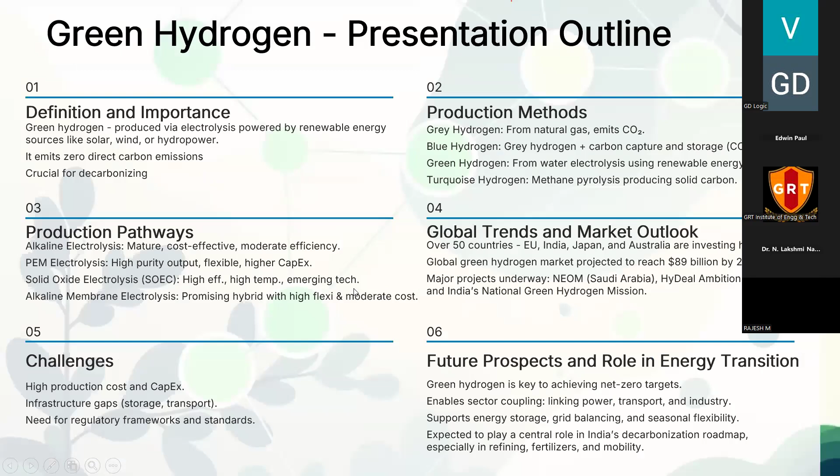Today we are talking about green hydrogen. The content of this presentation is definition and importance, then production methods, production pathways, global trends and market outlook, then challenges, future prospects and roles in energy.

What is green hydrogen? First of all, it is produced via water electrolyzers powered by renewable energy, solar, wind, resulting in zero GHG emission, in contrast with gray fossil fuel and blue fossil based carbon hydrogen, which are not covered in green hydrogen. Key attributes are zero direct CO2 emissions, high energy density, and it is a versatile carrier enabling decarbonization of hard to abate sectors.

Today we know that the process in which hydrogen is produced defines the color of the hydrogen. Now we are going to review green hydrogen.

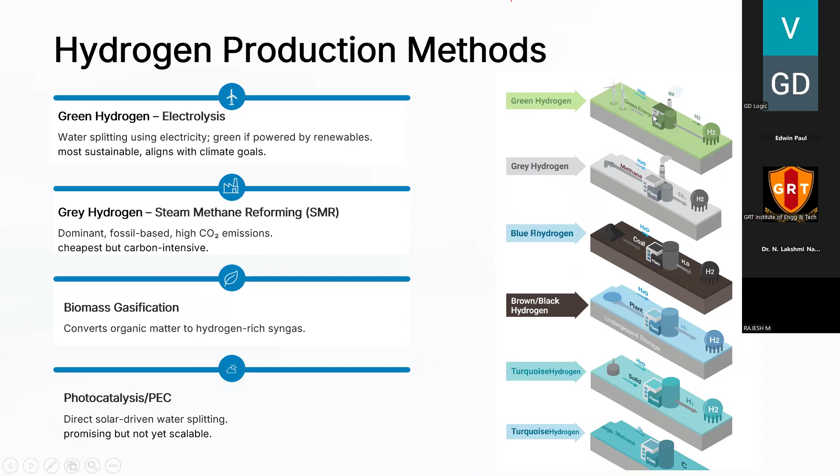If you see here, I've shown green, gray, and biomass gasification also. That is also one of the green hydrogen methods, and photocatalysis PEC also is there. The picture on the right side clearly explains green hydrogen, the windmill and solar system. If we use a solar system or wind renewable energy, then water is used.

This is a comparative overview of hydrogen production methods. Here I'm showing steam methane reforming. The natural gas reacts with steam to produce H2 and CO2, then separation happens. So fossil fuel, natural gas is the energy resource. The efficiency will be 65 to 70%.

The cost range is $1 to $2. The effect of this hydrogen is high CO2 emission, most common today, can be paired with CCS, carbon capture storage. If we consider carbon storage, then this will be blue hydrogen.

Then again coal gasification: coal reacts with oxygen and steam, and H2 is produced. We are using coal as the medium for this. The efficiency of this gas is 45 to 50%. The cost is very low, $1 to $2. The carbon footprint is high, used in coal-rich countries, environmentally damaging.

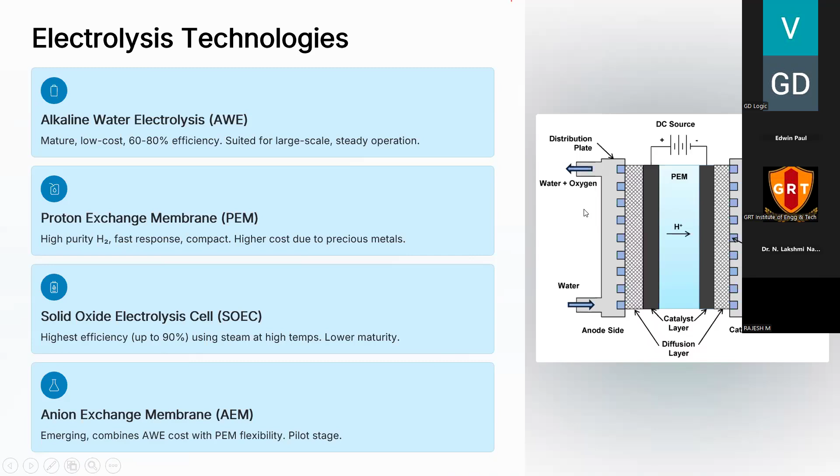I'm jumping to another topic, the electrolyzers. How H2 is produced through the electrolyzer method is very simple. Alkaline water electrolyzer, what we call AWE, mature, low cost, 60 to 80% efficiency, suited for large scale operation. The right figure clearly shows water as input, then the left side is the anode and right side is the cathode. The PM passes through this catalyst and we are splitting water; hydrogen is the output on one side, and water plus oxygen on the other side. So we are splitting H2 gas here.

In India's approach, future green hydrogen hubs across India: here is a regional breakdown of India's emerging hydrogen ecosystem. Hydrogen Valley Innovation Cluster, HVIC, launched in November 2025 under National Green Hydrogen Mission 2023. Gujarat is the hub for this. Major projects are by Reliance, Adani, and Ocior Energy, focused on export and industrial usage.

Then in Karnataka, there is ACME group and state government collaboration for green hydrogen production. Another program in Kerala: Vizhinjam Port and Kochi-Trivandrum corridor for bunkering. Odisha is also working on this. In Rajasthan, Inox Air Products is working on NTPC hydrogen projects. Then there is one more project in Tamil Nadu, emerging interest in coastal hydrogen infrastructure, potentially linked to export corridors.

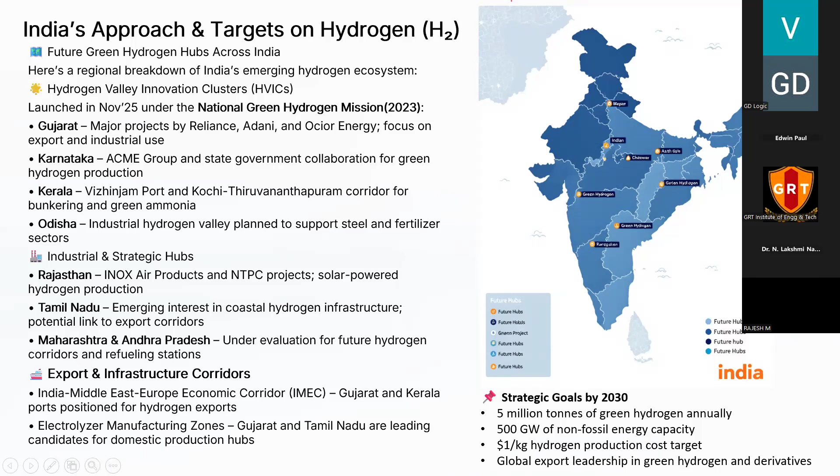The approach is very clear - India's approach, the National Green Hydrogen Mission. It was formed in 2023, then launched to make India a global hub for green hydrogen production and export. The target investment is 8 lakh crore, aiming to create 6 lakh clean energy jobs.

Cost reduction now, as we discussed, current cost is around $4.5 per kg. The goal is to reduce it to $1 per kg by 2030. That's our target.

This enables competitiveness with fossil fuel in steel, fertilizer, mobility, and heavy transport. Strategic partnership - hydrogen diplomacy with the Gulf nations and Europe. That is the strategic partnership we made, including the India-Middle East-Europe economic corridor for hydrogen exports.

Renewable energy integration means leveraging low-cost solar and wind power, and local electrolyzer manufacturing to cut costs. Our vision is global leadership by 2030 - to position India as the world's lowest cost green hydrogen producer by 2030, transforming industries, reducing carbon footprint, and boosting circular economy innovation.

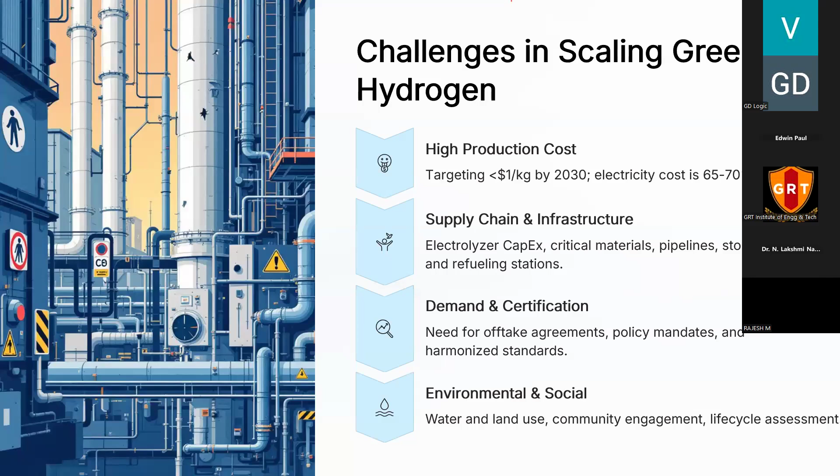Then demand and certification needs offtake agreements, policy mandates, and harmonized standards. Now, each and every research and government body is working towards standard formation and policy - the whole team is working on this. Then there's environmental and social aspects: water and land use, community engagement, life cycle assessment.

Future prospects and role in energy transition: decarbonization, essential for net zero targets in hard-to-abate sectors. Energy storage is another future prospect. Then global trade and innovations - a lot of innovation is required from research-oriented institutions, government bodies, and OEMs.

A lot of OEMs are working on innovating the application and production. Then there's just transition, job creation, regional development, and energy security.

In green hydrogen production, there is one method, steam methane reforming (SMR) technology. The technical details on process: its emission cost is 7.5 to 12 kg CO2 per kg of H2 produced. Blue hydrogen integrates carbon capture up to 90% removal, but upstream methane leakage remains a concern.

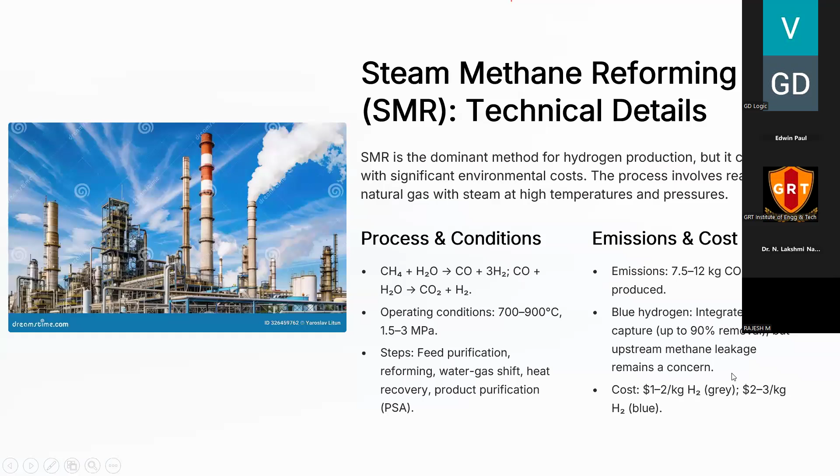Just a minute. Oh, sorry, I lost it. Sorry about that. My screen is below, sorry.

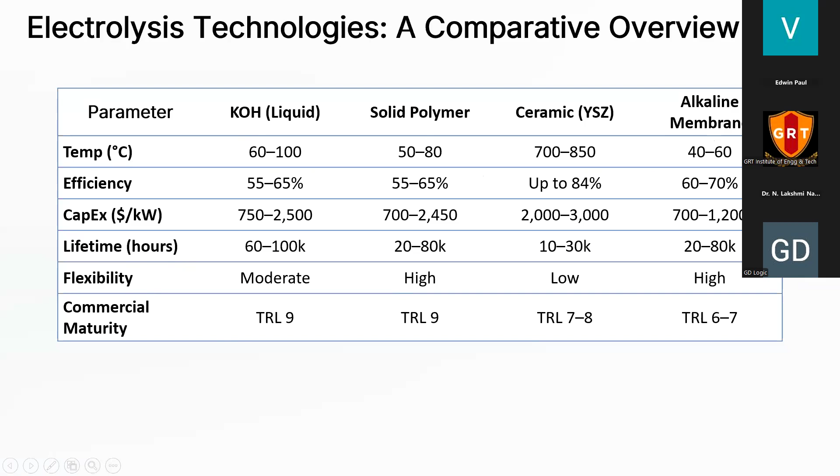When we see the parameters of different methods: the temperature in the KOH method will be around 60 to 100, and the solid polymer 50 to 80. The ceramic method is 700 to 850, and alkaline - this table clearly shows the difference between the different process methods.

Biomass gasification is another method of producing gas, converting organic matter into syngas at 700 to 1200 degrees centigrade, which can achieve negative emissions with carbon capture and storage.

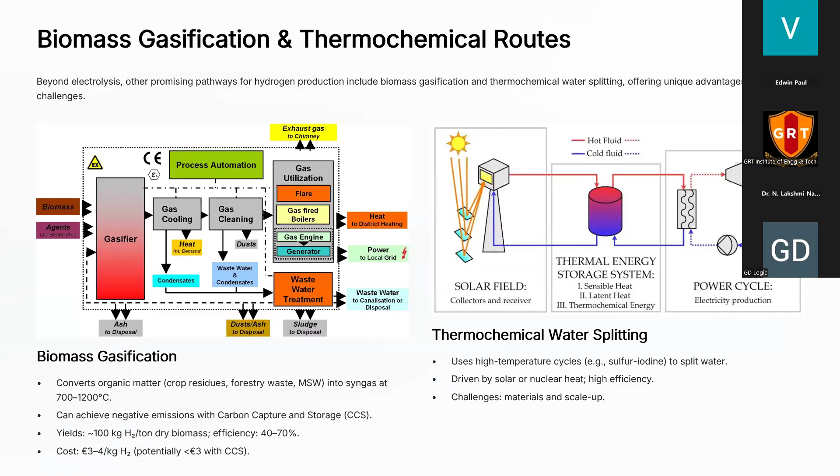There is another method, thermochemical water splitting, using no photocatalyst, and direct solar-driven water splitting using semiconductors and catalysts.

There is another complicated method called biological hydrogen production. A lot of R&D is going on in this method - dark fermentation and photo fermentation, biophotolysis, and microbial electrolysis cells are being used.

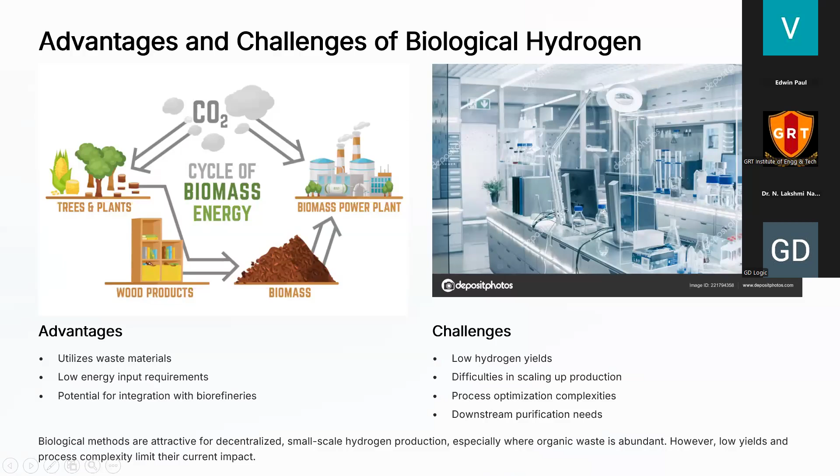The comparative assessment of hydrogen production methods: for the SMR method, the GHG emission per kg of hydrogen is 9 to 12 kg of CO2. The water usage is around 9 liters per kg of hydrogen. The typical cost would be around 80 to 120 rupees.

If we make it through SMR plus CCS (carbon capture storage method), the color coding will be blue. Emission is 2 to 7 kg CO2 per kg of hydrogen, water usage remains around 9 liters, and the typical cost will be 160 to 200 rupees.

Today's topic is about green hydrogen. One of the methods is electrolyzers. The emission is 0. If it's powered by renewable energy, then it is 0.

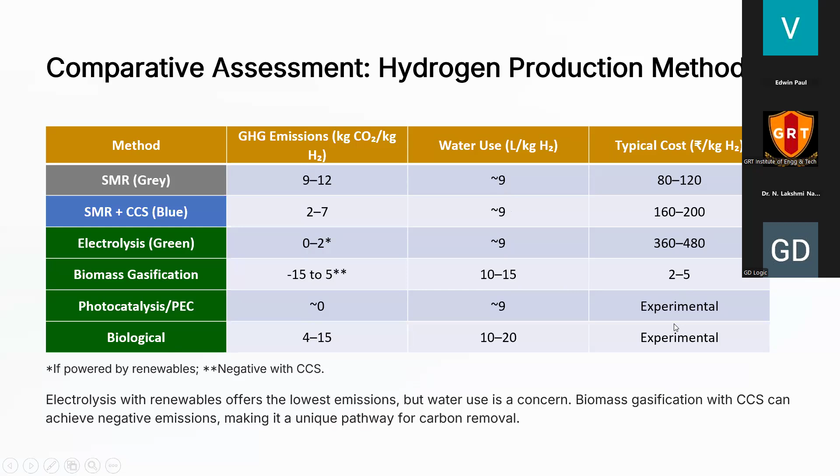Similarly, photocatalyst and biological methods are under experiment, so the cost is not available at the moment.

The production pathways: electrolyzers with renewables is the most mature green hydrogen pathway, integrating with solar, wind, hydro, rapidly scaling with global electrolyzer capacity projected to reach 230 to 520 gigawatt by 2030.

If we consider photocatalyst and PEC, direct solar to hydrogen conversion is promising for future cost reduction. Key research focuses on catalyst development, reactor design and scale up. There is another method, biological method, which includes dark fermentation and photo fermentation, but the yield is very, very less in this method.

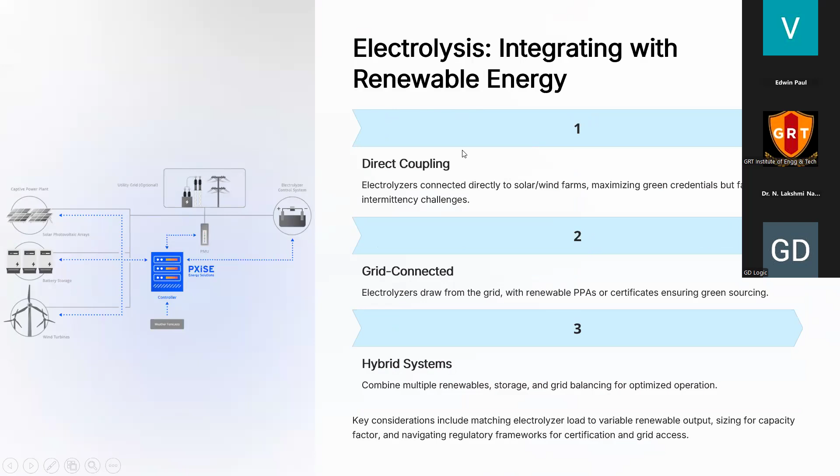Renewable energy - electrolysis integrating with renewable energy, grid connected hybrid systems. Electrolysis manufacturing and supply chain is again a challenging one.

India is focusing on this. The key trend here is focus on cost reduction through scale and automation shift. A lot of R&D is going on this.

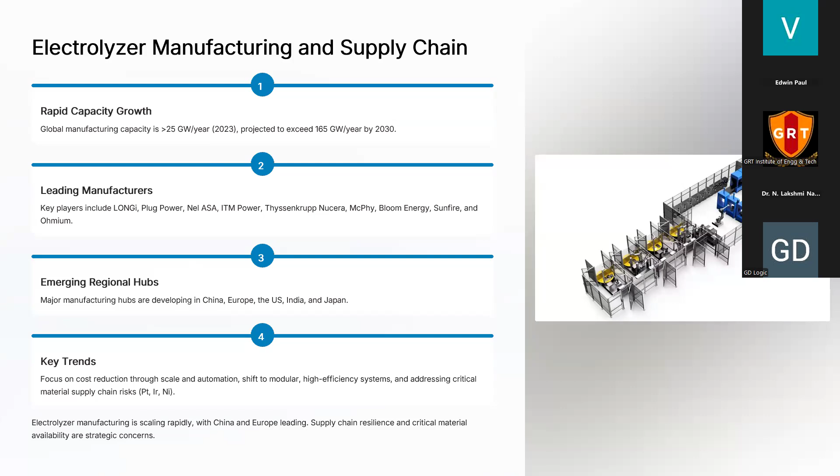At the moment, looking at global trends in the market, so many countries, research institutions and OEMs are working on this.

Hydrogen demand exceeds 90 million tons per year at the moment in 2025, with green hydrogen rapidly growing from less than 1% of supply. Project boom - over 1,500 green hydrogen projects announced globally, targeting, as I told you earlier, 230 to 520 gigawatt.

Now leading the regions - China is leading these developments, and a lot of R&D is going on. Then Australia, EU, European Union, then United States, India also we are working towards this target. Saudi Arabia, Oman, Chile, a lot of countries are working.

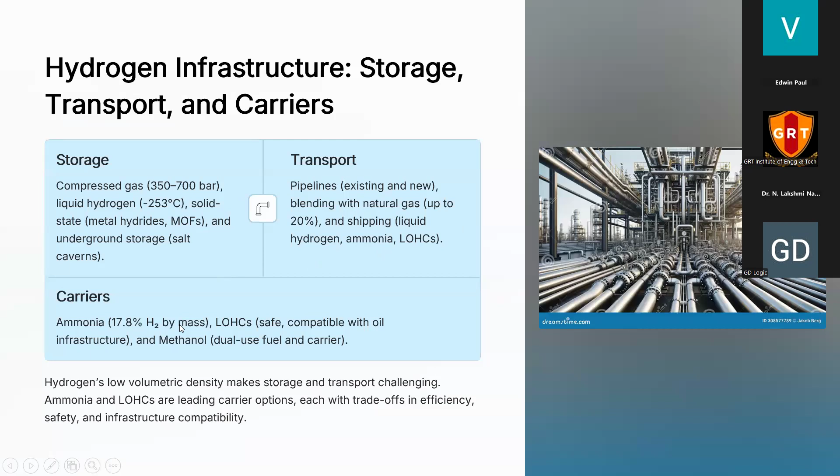If we talk about the India specific context and national strategy, as we're discussing, the National Green Hydrogen Mission (NGHM) was launched in 2023. We are targeting 5 million metric tons per year of green hydrogen by 2030. 8 lakh crore rupees they are planning to invest in this program, with incentives for electrolyzers and manufacturing, production, R&D, infrastructure, and skill development all over India.

The government is approaching and guiding us. The green hydrogen standard is less than 2 kg of CO2 per kg of hydrogen. That is our target, as a 12-month average, 1 year.

Major projects - Pudimadaka, Tamil Nadu, Adani Total Energies, GAIL also working, IOC, NTPC, everyone is giving their contribution for these major projects through policy tools.

Waiver of transmission charges, SEZ support, then single window clearance, environmental exemptions, export strategy - we are targeting 10% of the global market. India will be a player for this. We are making partnerships with European Union, Japan, and Australia.

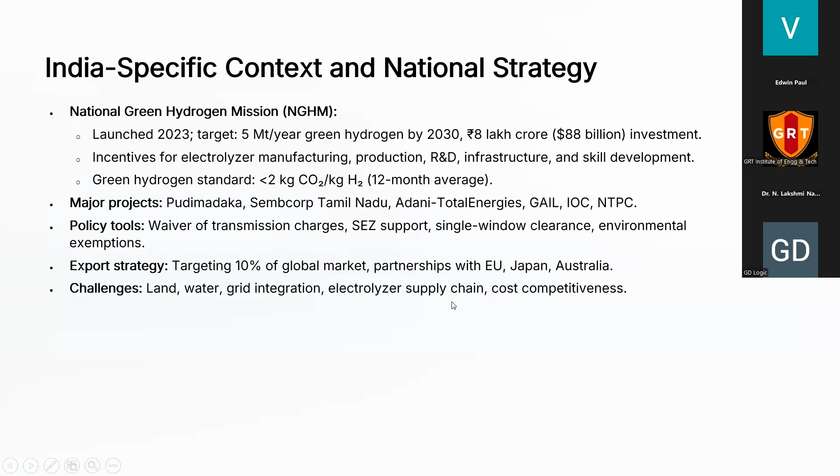A lot of certification schemes are going on; standards are still being framed. Many preliminary standards are already available, and many OEM players are working on this.

The key elements we consider for mobility or industrial usage are emission intensity threshold, renewable electricity sourcing, guarantees of origin, digital certification, and alignment with international trade and WTO rules.

In conclusion, in the clean energy transition, electrolysis using renewables is the leading green hydrogen pathway with rapid scaling and cost reduction. Global market momentum is strong, but challenges in cost, infrastructure, and certification remain. Major projects and policy frameworks are shaping the future landscape, and academic institutions have a vital role in research, education, and workforce development.

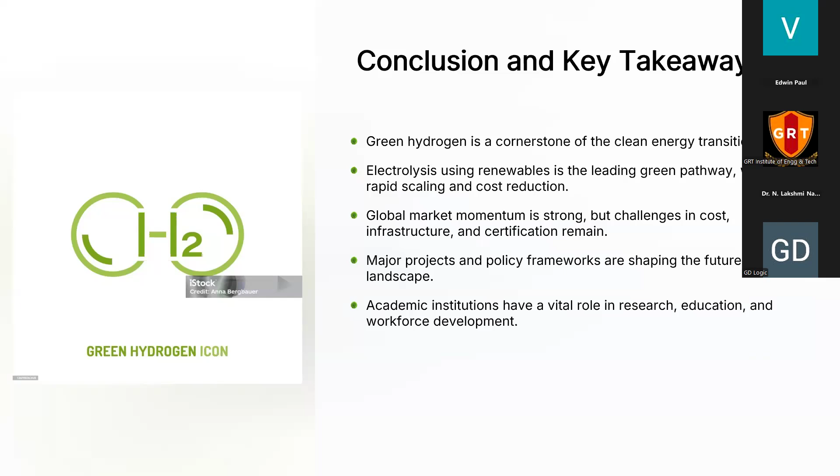So, I'm going to touch upon the application in automobile engines, hydrogen engine systems, and combustion engines.

Just a minute. Sorry.

Introduction: when we talk about hydrogen engines, they represent a pivotal advancement in automotive technology, leveraging modified internal combustion engines to run on hydrogen fuel.

In India, many OEM players are working with other fuel manufacturers like Reliance and IOCL. Many OEMs are working with these oil companies, and a lot of R&D is going on in this area.

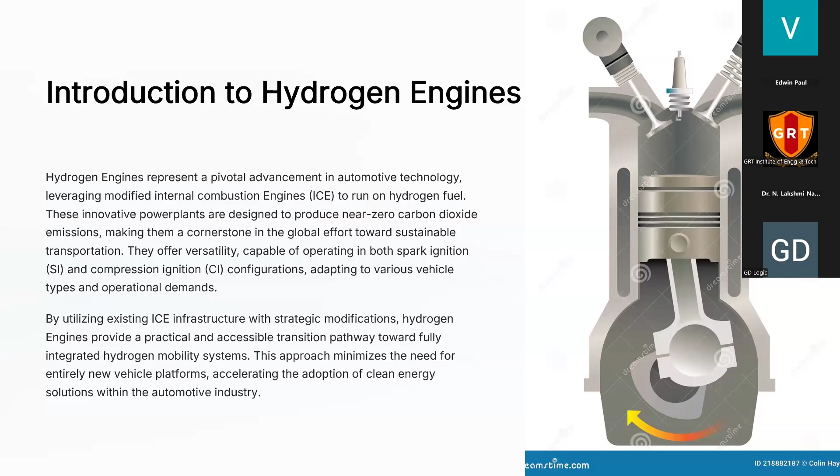When we talk about hydrogen engines, this is very similar to SI spark ignition engines. The change of components will be very similar to CNG engines. Some components need to be modified; we will go through this.

Why hydrogen as a fuel? It is abundant and renewable, zero carbon content, and high energy. The energy density in hydrogen is exceptional, so retrofit capability is quite possible on SI engines.

When we talk about hydrogen properties relevant to engines, understanding hydrogen's unique properties is crucial for successful engine design and conversion. These characteristics profoundly influence combustion dynamics, storage requirements, and safety protocols.

Very low ignition energy: hydrogen requires significantly less energy to ignite compared to gasoline, which increases the risk of pre-ignition and knocking. Engine knocking can happen, and backfire can also sometimes cause difficulties.

Low density: hydrogen has low volumetric energy density, necessitating high pressure storage solutions such as compressed gas tanks to achieve practical driving ranges.

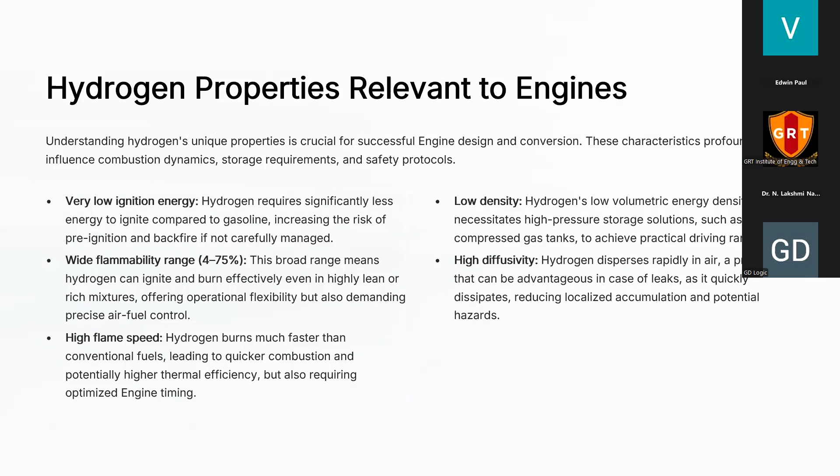The key benefit of hydrogen is its ability to support ultra lean combustion. This means the engine can operate with a much higher air-fuel ratio than a traditional gasoline engine, because of hydrogen's high diffusivity property.

So the air-fuel ratio will be good.

The combustion process in hydrogen engines: in spark ignition engines, the hydrogen combustion process shares fundamental similarities with gasoline engines, but incorporates critical differences due to hydrogen's unique properties.

The hydrogen and air mixture can be introduced either via port fuel injection into the intake manifold or direct injection into the combustion chamber through high pressure direct injection. At the moment, many OEMs are working with the port injection method only, PFI.

Spark ignition is similar to gasoline engines: a spark plug initiates the combustion. However, hydrogen's very low ignition energy necessitates precise control to prevent unintended ignition. Rapid flame development is also part of the combustion process, leading to early flame development in hydrogen combustion that is significantly faster than that of gasoline.

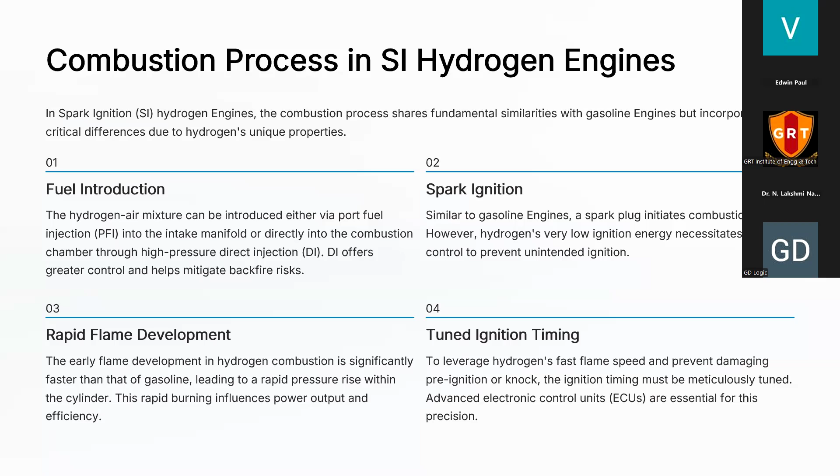The ignition timing is another challenge we need to work closely on during the engine calibration. The challenges of combustion, as we discussed earlier, pre-ignition will be one of the major challenges. Hydrogen's low ignition energy makes the engine susceptible to pre-ignition from hot spots, for example spark plug or exhaust valve, leading to uncontrolled combustion and potential engine damage.

There is another issue we need to consider: backfiring, where combustion occurs prematurely in the intake manifold. This is a significant risk in port injection hydrogen systems.

There is another challenge of knocking tendency, so high NOx emission may need a very good engine after-treatment system. The reduction in volumetric efficiency is another challenge.

What modification is required for a hydrogen engine? Hydrogen compatible injectors are required, since the temperature will be so high we need compatible injectors. Then the injection strategy, port injection or direct injection, has to be optimized through various tests and visual analysis. Then we need backfire arresters.

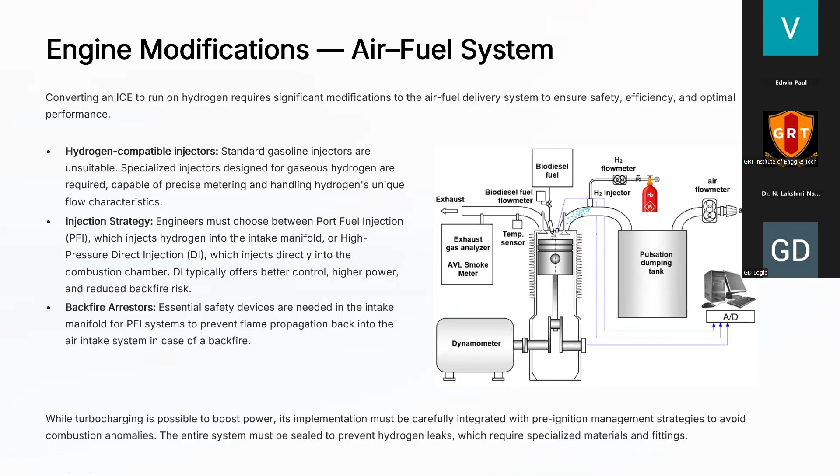Now, strong engine modification in the ignition system: a strong ignition coil is required, then optimized spark timing, modified plug design, then ECU remapping is required. The ignition coil now needs hydrogen lean burn capability, so it may misfire under certain conditions. We need to focus on ignition coils and spark plugs.

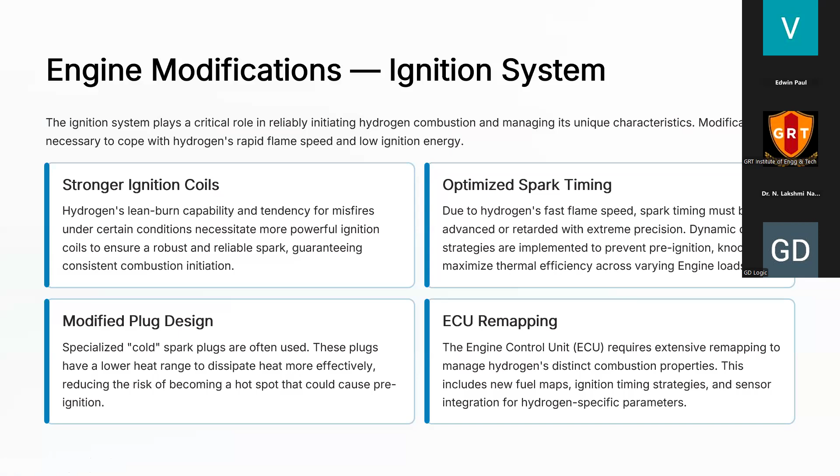The timing also, when we consider backfire and pre-fire, we need to optimize the timing through various exercises and visual analysis. A lot of experiments have to be done to optimize this timing. Then modified plug design is required, and ECU calibration is required for this.

A new piston crown design is required when we consider flame speed is so high, along with the temperature. Considering all these things, a new piston crown design is required, then material upgrades to withstand high temperature.

And with these fuel properties, many oils have to be optimized for these changes. So components like valves, valve seats, and cylinder heads may require materials with enhanced heat resistance and durability to withstand these conditions.

The compression ratio also has to be optimized based on the efficiency engine to engine; we need to optimize the compression ratio. The cooling system also is key for risk-free ignition and to ensure the engine.

In the exhaust system, what has to be considered now? NOx catalytic control - so a robust enough three-way catalytic control design is required to convert the NOx. So high temperature exhaust valves are required, and an exhaust flap valve is required for this.

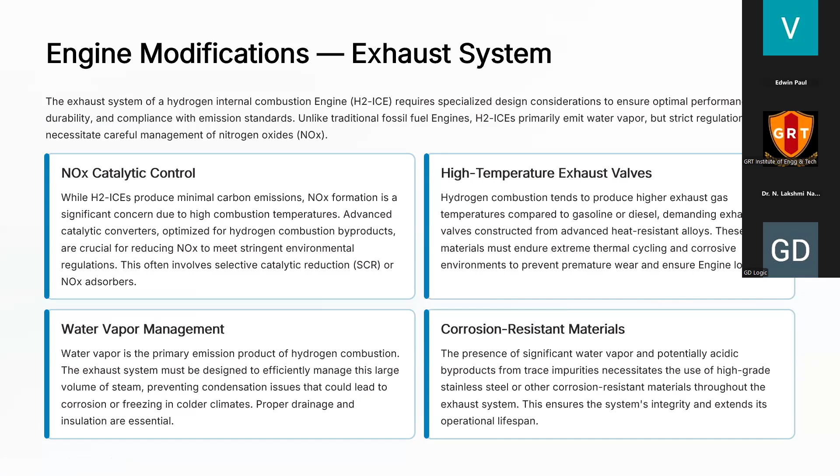Another big challenge is the storage system. We need high pressure tanks, around 700 bars. We need to brainstorm on this cylinder design and storage, where the cylinder will be stored.

Composite tanks - a lot of R&D is going on for this. Few OEMs are working on this; I would say Ashok Leyland, Reliance, and recently JCB got a preliminary certificate to use this H2 ICE engine. JCB, then Caterpillar - a lot of OEMs are working on this, lots of R&D work is going on.

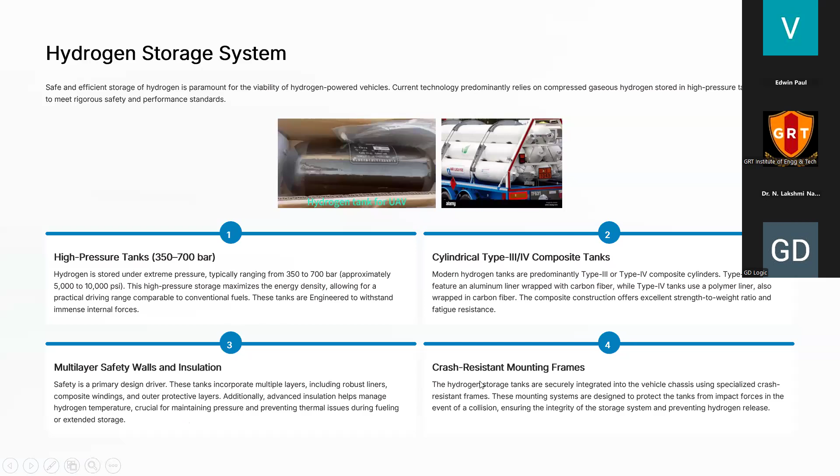Then another safety aspect - wall insulation is required, then crash resistant mounting frames are required.

The high pressure delivery system needs pressure regulators, two stage or three stage. At the moment we are using two stage regulators in CNG vehicles, but in this case three to four stages may also be required based on the layout.

The high pressure line has to be taken care of, and solenoid safety valves - a lot of component durability work is going on, with many certification agencies working on this to arrive at safety standards on H2 valves and safety valves.

Then another challenge is leakage. Green hydrogen has a small molecular size, and since it is a small molecular size with high flammability, there is a chance of mixing. The high pressure delivery system must be absolutely leak tight, so we need to focus on tight connections.

The ECU interface is another challenging subject - custom hydrogen fuel mapping, unlike gasoline or diesel, is not like that. Hydrogen has a wide flammability range and burns very quickly. The ECU requires unique fuel maps to precisely control the air-fuel mixture, ignition timing, and injection strategies for optimal combustion efficiency, power output, and minimal NOx emission across all operating conditions.

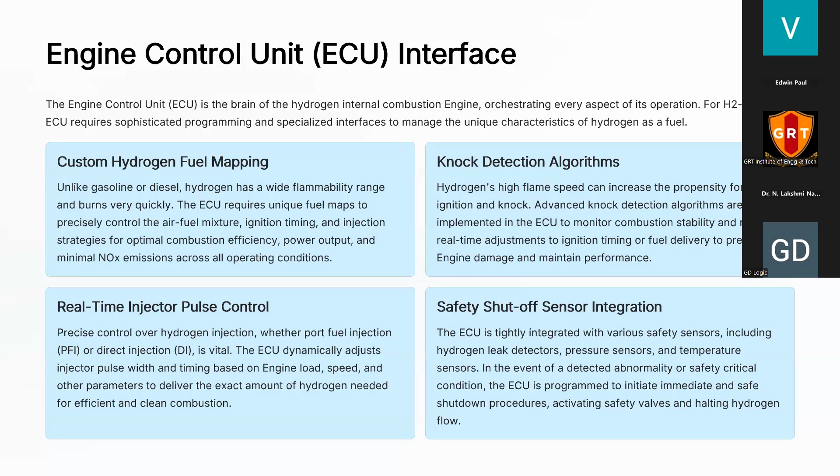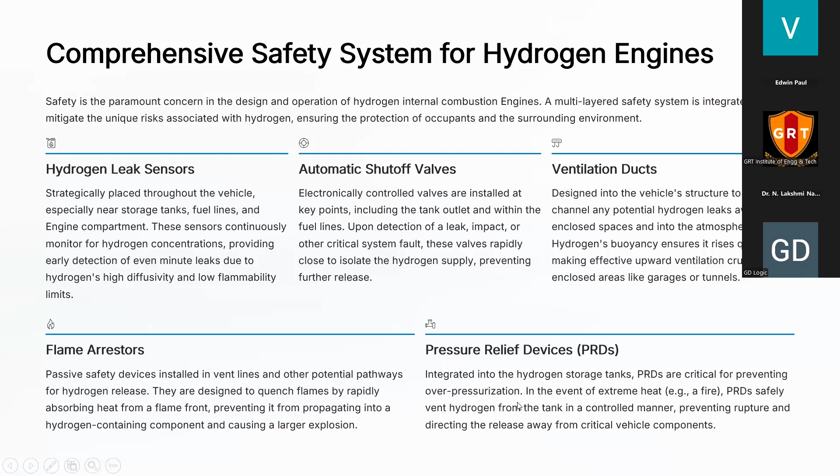For safety systems, hydrogen engines need hydrogen leak sensors, then automatic shut-off valves, and ventilation ducts are very much required for this kind of vehicle, along with flame arresters. Pressure relief devices are the most critical part of this application.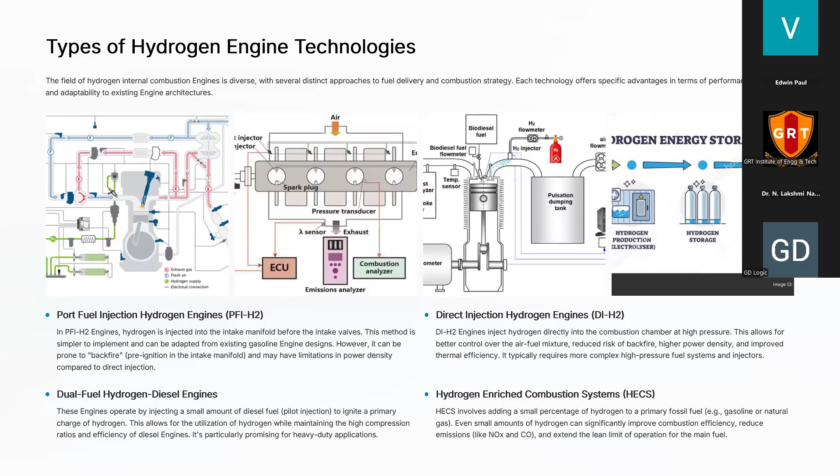When we discuss performance characteristics of hydrogen engines: high efficiency under lean operation, high torque achievable with direct injection systems, but challenges are there in direct injection systems like knocking and ignition. A lot of challenges are there in DI systems. Zero CO2 emission at the tailpipe is a characteristic, with reduced PM and HC emissions.

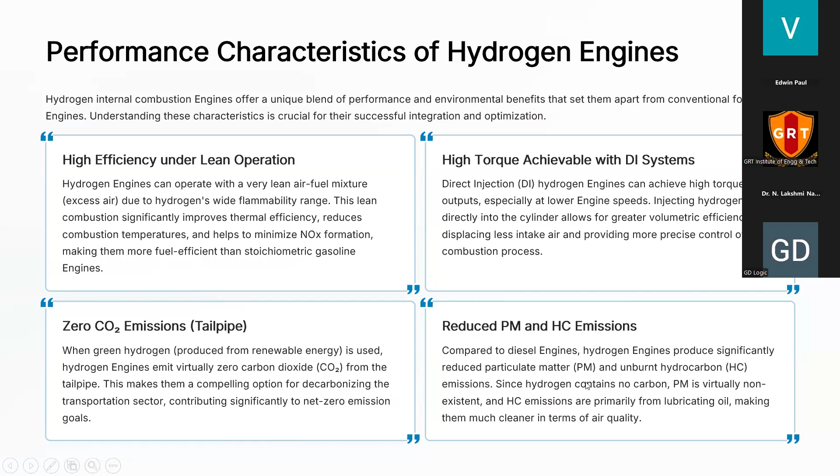Applications of hydrogen engines include heavy duty trucks, which our government is mainly focusing on. The strategy is very clear: by 2030, all passenger and light commercial vehicles with hybrid, gasoline, and EV. That is the approach. And medium commercial vehicles, M&HCV and HCV, with hydrogen and fuel cell. That is the direction and suggestion given by the Ministry of Highway.

Another segment is non-automotive, like tractors, gensets, and other construction equipment vehicles. They are looking at some alternate fuels like biodiesel blend, ethanol, methanol, and one more fuel, isobutanol, and some of the European Union are working with hydro-treated vegetable oil. So a lot of this is the approach.

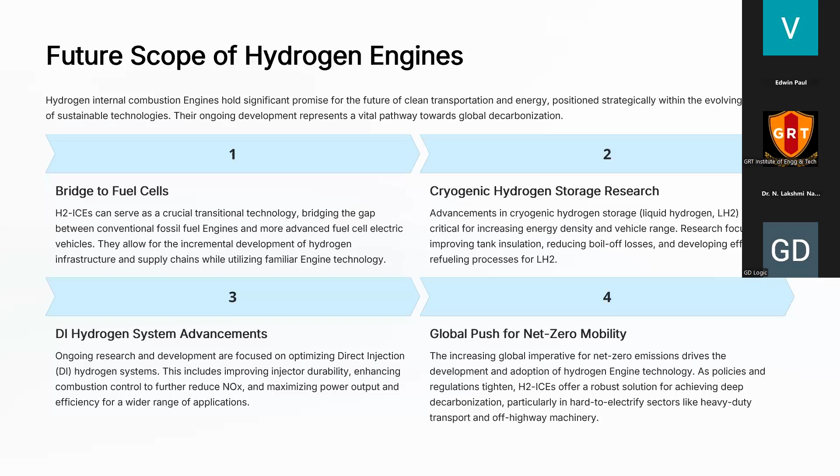Hydrogen engines offer clean mobility using existing ICE platforms. A lot of R&D is going on to convert existing gasoline engines to H2 ICE. Some OEMs already did this - I think Ashok Leyland already did this experiment, converting an existing SI engine to H2 ICE, and durability runs are going on, with required modifications in combustion injection engine architecture. Engine system integration demands strong safety and control systems, a promising technology for future decarbonized transportation.

When we talk about hydrogen, we know there are a lot of debates and wars going on around fossil fuels currently - petroleum products, a lot of politics and other things. Our Indian government's idea is to minimize or make it zero after 2030. The fossil fuel usage will be very limited.

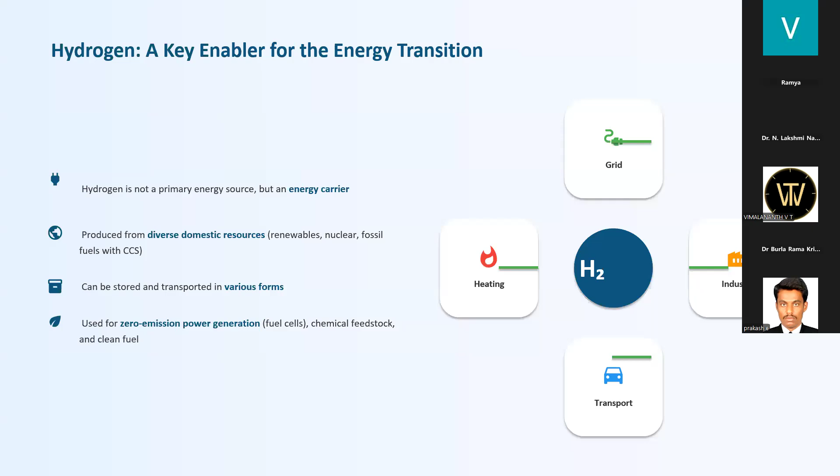And it can be used in fuel cells, that is hydrogen fuel cells, which are getting popular in recent times. It's called a clean fuel because it does not have any carbon to it. So combustion of hydrogen is obviously going to give you only water vapor.

With respect to production, we mostly produce hydrogen only from natural gas - that is, steam methane reforming. But one of the major problems is the high CO2 emission, about 95%.

Then after some research, we came to something called blue hydrogen, where CCUS is being used - that is carbon capture. Either carbon is captured through absorption or adsorption, or it is converted to some other form. So the hydrogen was produced using that. It's the same technology as gray hydrogen, but the CO2 is reduced to some extent.

But of course, we cannot eliminate the CO2 completely. We can reduce it from 95% to about 50%. That's the maximum that we can do.

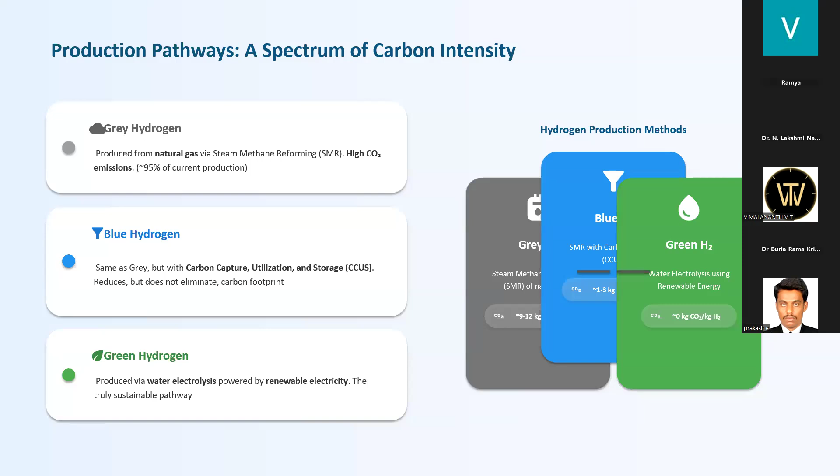Green hydrogen is getting popular nowadays. That is because it is produced through water electrolysis, and most importantly, if we use electricity from renewable sources, obviously it is one of the sustainable pathways.

So what are the benefits of hydrogen? Why are we talking about it? Why you need to produce hydrogen is, first thing, as I already told, combustion produces only water vapor because it does not have any carbon. Energy density, or we can say the calorific value, is about 3 times that of gasoline or diesel.

It's about 120 megajoules per kg. And it is very versatile - it can be used in fuel cells, turbines, engines, and a lot of applications. And another very important thing is it can be stored for a very, very long time. Unlike diesel, which will have some problems with long storage, hydrogen will not have that problem. So for decarbonizing, hydrogen can be used as one of the major feedstocks.

Now we have talked about the advantages. Now what is the problem with this is, one thing is going to be the storage and the transportation. It's very, very difficult, and also costly to store because of the low volumetric density.

Production cost - of course, green hydrogen is obviously sustainable, but the production cost is very, very high compared to gray hydrogen. That's why most of the hydrogen we produce is only gray hydrogen. We are not going to green hydrogen because currently the production cost is very high.

And most importantly, why we still don't have direct hydrogen fuel cars on the road is because of safety. It's very, very highly flammable. It has a wide flammability range and a low ignition energy, and its flame is invisible. So these are the safety aspects, and we also lack infrastructure in production, distribution, and dispensing. One important thing is hydrogen embrittlement on some metals.

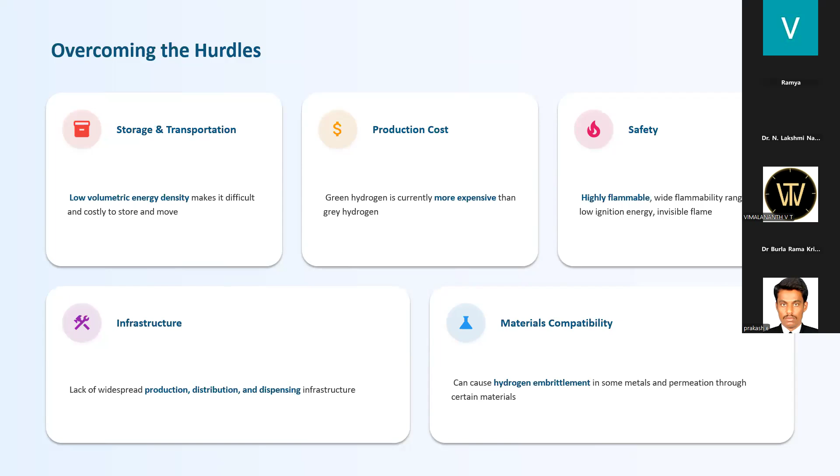So this is what I've been telling you. The flammability limit, the ignition energy is very, very low, so even a small spark can ignite it. Flame speed is very, very fast. And one of the important problems is flame flashback, which means that once it's getting combusted in the IC engine, it can come back to the intake manifold and it can burst.

So how we can store the hydrogen: one option is compressed gas, which is very common. We compress it to a pressure of 350 to 700 bar. It's fast filling and fast discharging as it is in gaseous state, but one problem is the high energy cost for the compression.

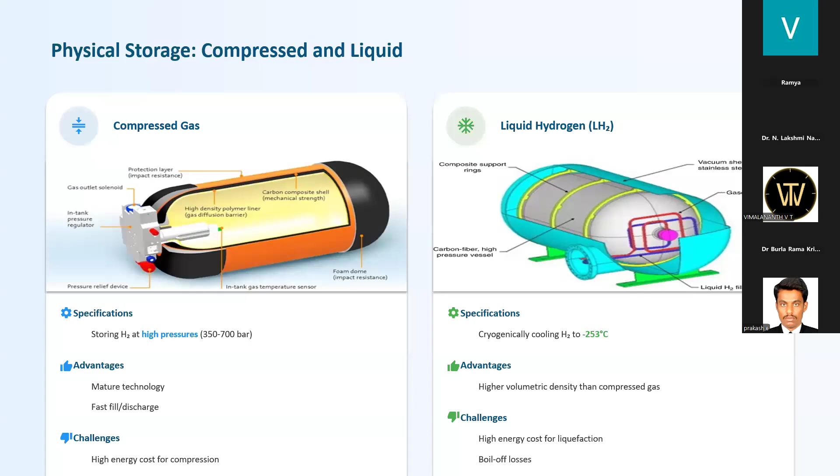Liquid hydrogen is mostly used in aircrafts and space shuttles as of now. It is stored cryogenically at minus 253 degrees C. It has a very good volumetric density compared to compressed gas, but the problem is the high cost of liquefaction and also the boil-off losses, since when it changes state from liquid to gas, there are some losses.

In recent times, a lot of research has been done on metal hydrides. Of course, metal hydrides are good, but again it has a problem of cost - how cost effective it is going to be is another problem. But one thing is metal hydrides are very, very safe compared to gaseous and liquid storage.

So recently, what they are doing is using adsorbents where the hydrogen is stored in the adsorbent and then released whenever necessary - something like activated carbon. It has very good kinetics and is fully reversible, but again the problem is going to be the cost and also the wastage in these things.

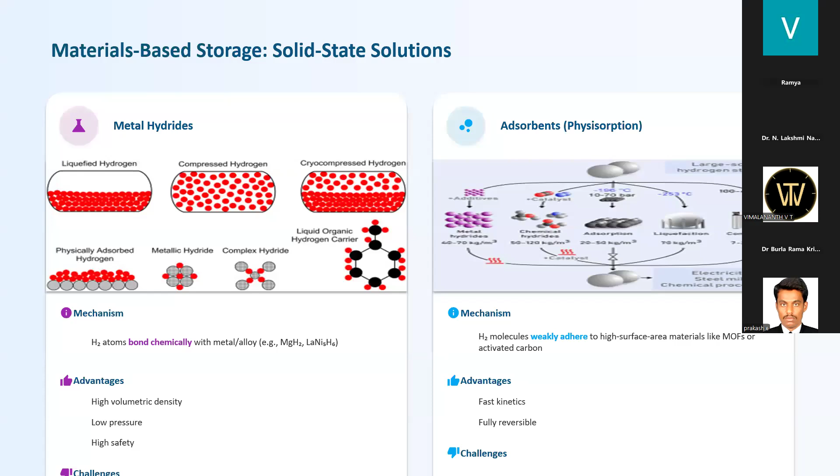Okay, so coming to production - how we can produce green hydrogen. This is a very basic thing. We all know that water with electricity is going to produce hydrogen and oxygen. It's a very simple thing, simple physics.

Now, what is the problem with this? This is so simple - we have an anode and cathode in the water, and water is going to be converted to hydrogen. The problem is going to be only the mass - the amount of hydrogen that we require cannot be matched with that. So we need a large infrastructure for this electrolysis.

That is why we are doing a lot of modifications - increasing the efficiency, how much hydrogen can be produced, and also minimizing the energy that we are consuming.

So basically it has the cell, it has an anode and cathode, and there'll be stacks connected in series. You also require DC power and water purification, RO water, because contaminated water is going to contaminate the hydrogen that is produced. These are all some of the important things that are required.

In electrolysis, one important thing is the unconverted energy generally creates heat, and that is also going to be an issue. So we need an active cooling system to prevent the system from overheating.

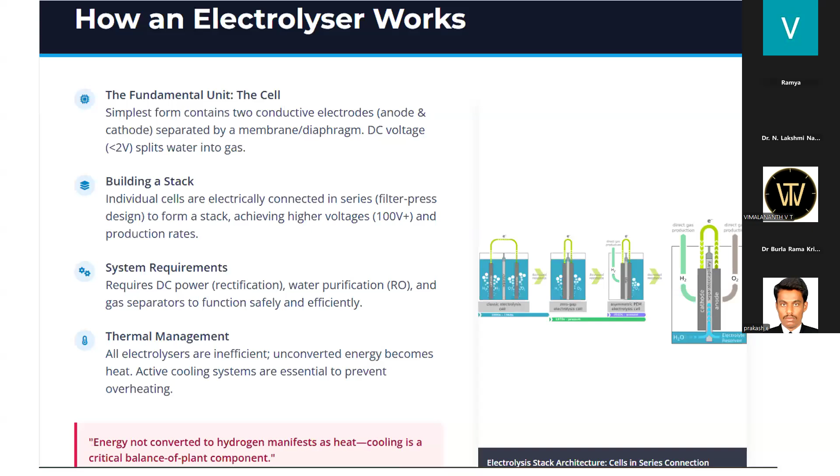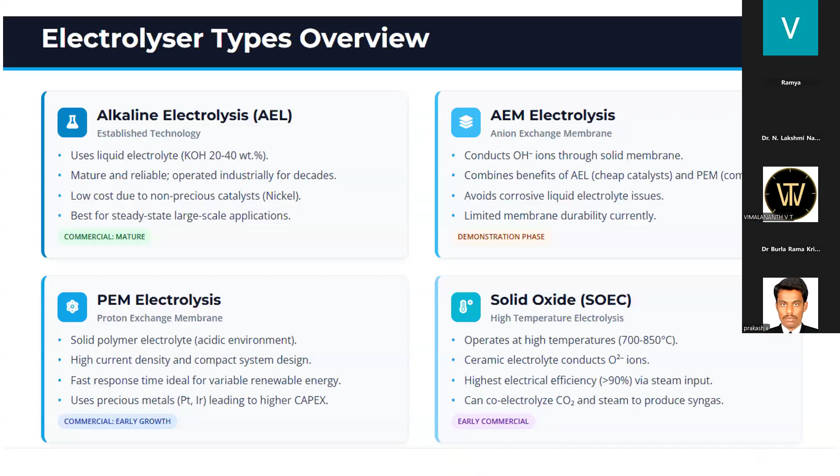So the topics you are going to see are obviously alkaline electrolysis (AEL), then PEM, and recent research into the combination of these two, which is AEM, and also of course solid oxide, which is the latest trending research.

Why do we need real cells more than theoretical voltages? Because of the losses. So along with the theoretical voltage we calculate, which is 1.23 volts, there will be some losses up to 1 volt. So the actual operating voltage will be approximately near 2 volts.

So what are all the performance losses that we can see when we are producing hydrogen? One thing is the catalyst dissolution. The active material in the catalyst, the loss of this active material is going to be one of the major issues. Another thing is the membrane thinning.

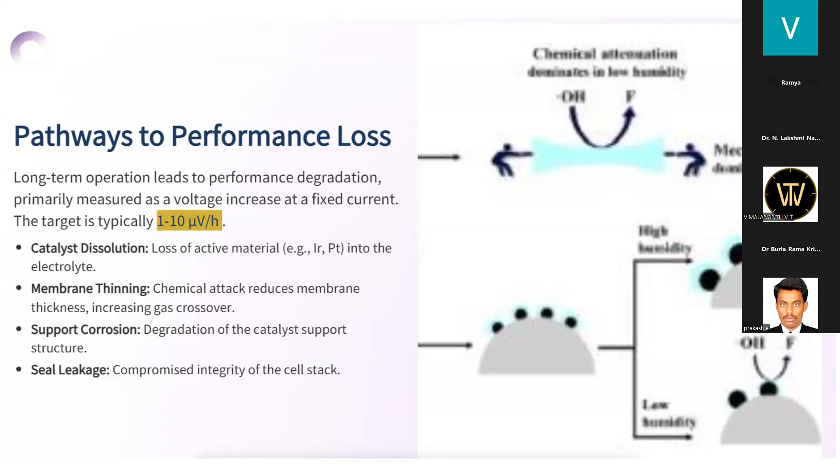So when this chemical reaction keeps on happening, after some time, the membrane gets reduced actually, and also the corrosion - that is one of the major problems, and of course the leakage.

So coming to the alkaline electrolysis, now it is one of the very mature technologies, and it's commercially being used in all the industries also. And of course, we can also do much more research in this, but still there are some issues.

So the basic principle is obviously we'll be having a high concentrated alkaline solution, typically used as KOH. NaOH can also be used. That is for conducting ions between the electrodes.

So in the cathode, what's going to happen is water is reduced at the negative electrode. The hydroxide ions are produced and it goes to the anode. Then again it is oxidized in the positive side, and then the oxygen gas is liberated at that point.

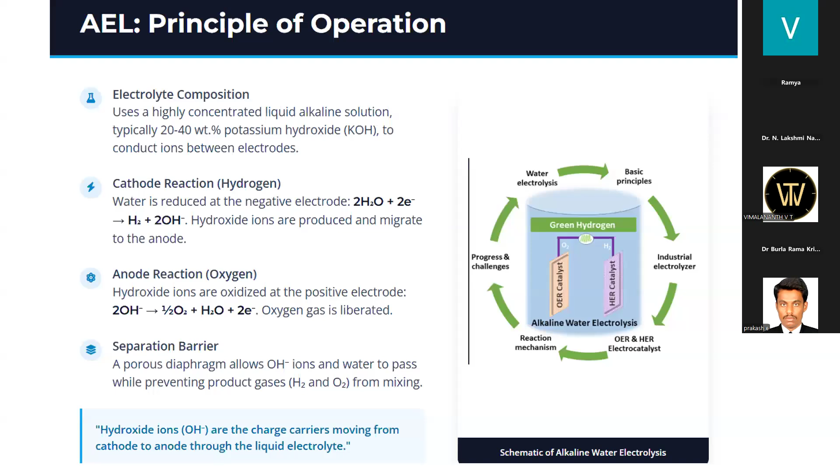You are having a separation barrier between these two electrodes. That barrier, a diaphragm, is kept between these two to prevent both the hydrogen and oxygen from being mixed, so that we get the pure hydrogen out of it.

Now the latest thing, as I told, this is a very traditional design where we always had a gap between the electrodes and the diaphragm - approximately 1 to 3 gap was always there. But now the zero gap architecture is where there is no gap between both the electrodes and the diaphragm.

Electrodes are actually pressed directly to the diaphragm in this case. And obviously, ohmic resistance, the resistance to the flow of current, is actually high for the traditional type, but it is actually minimal in the zero gap architecture.

The current density is also very low for the traditional type where the gap is there. Here it is actually good because the stack is very compact, it is very nearby. That is the reason the current density is actually high.

Of course, complexity - the gap design is very simple to make, but here you require a lot of things, a lot of meshes, a lot of springs to actually keep it together. So that is one of the complexities with respect to the construction of it.

So what are all these separators that we have been using? The ceramic and polymer composites is a very common thing. But nowadays, what people have gone to are composite materials like zirconium oxide and Zirfon. So all these things have very high durability and also good conductivity.

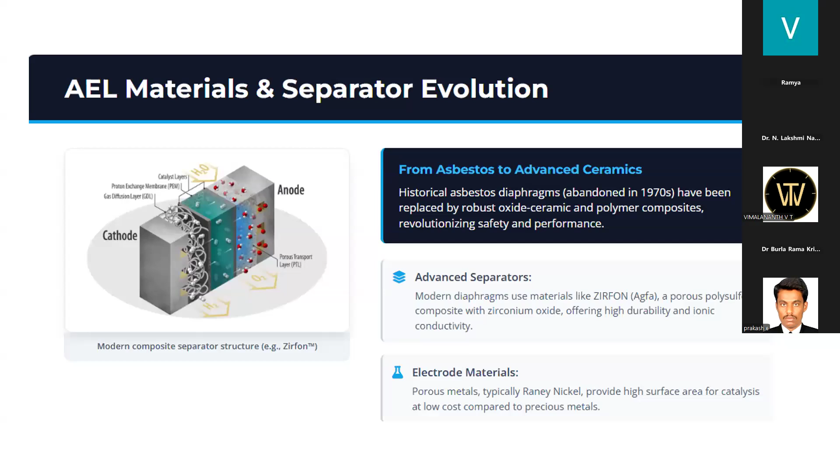Obviously, the kinetics is going to improve, the ions are going to move faster. But what happens is the diaphragm degradation will be very fast, and also the gas purity will be very less. So that is the optimum temperature that has been followed.

Again, the current density is also maintained between 0.2 and 0.5 ampere per centimeter square. And also the operating pressure is kept within 30 bar, because more pressure means there will be a problem with respect to the sealing.

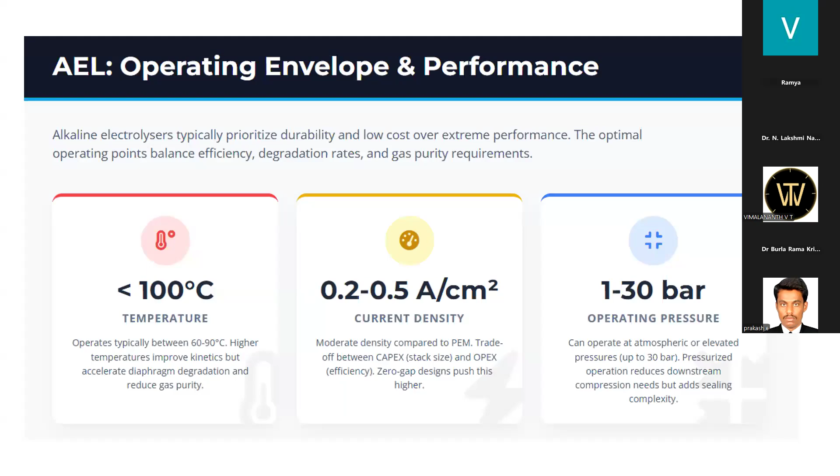And again, what we are doing is only for two things: one, to get a very good efficiency from the system; another one is to get pure hydrogen. So along with the electrolyzer, what are the other things that are required for the hydrogen to be produced?

So we need, as I told you, an RO water unit that is kept here. Of course, we need a DC - so AC to DC converters required to be sent to the electrolyzer, and we also have a lye tank and pump for that.

And we also have a hydrogen gas separator where it separates the hydrogen, where you get the pure hydrogen. And we also have an oxygen separator there. A separate cooling system has also been provided for this.

Because when hydrogen is produced, always remember, from the electrolyzer, we will never get pure hydrogen. So we have to do some filtering process. That's where the hydrogen gas separator is kept, and then we get the pure hydrogen. Also, the dryer is there because there will be some water molecules present along with the hydrogen. So these two stages are very, very important to get the pure hydrogen.

So water purity is one of the most important things. These are all some of the things required to get to the very pure hydrogen that we need. We cannot achieve 100%, but at least 99.9% we can achieve.

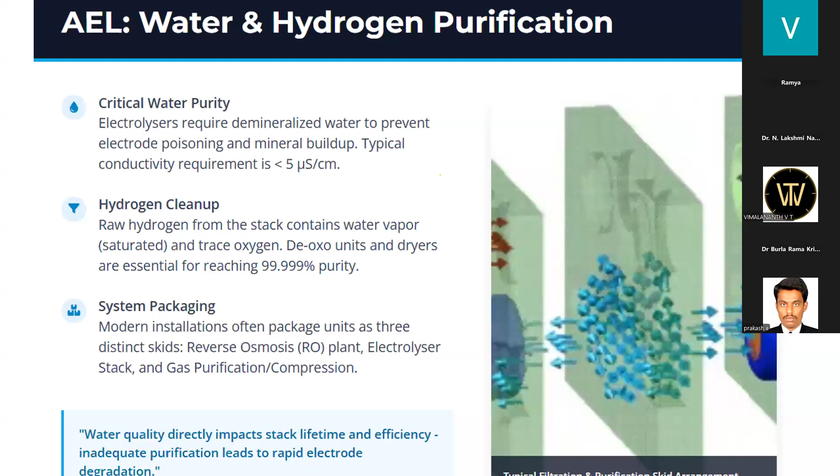One of the most important things is we generally use RO water for this - reverse osmosis, which has very good water purity. Also, hydrogen cleanup is very important after the hydrogen is produced from the electrolyzer, because it will have some water molecules and some trace oxygen in it. So for reaching the highest purity, we need to use a hydrogen purifier and also dryers. These are some of the things required to get to the purest form of hydrogen.

So what are the advantages? It's obviously a very old and proven technology, already used in most industries. The initial capex - the initial money put in - is very low, and it also has a very good lifetime. It can also be easily scalable for industries. That is one of the major things.

What are the problems? The electrolyte - handling the KOH - is actually a bit of a problem, and the electrolyte tends to corrode very easily. That is one problem, which comes under the running cost, and also the low current density is another issue.

Cold start - there are a lot of problems during cold start. Of course, with the next things, PEMs and other SOFCs, we have reduced that problem. But here we have a cold start problem, and it also operates under very low pressure. Hence you require a compressor to get the hydrogen stored.

And at very low loads, what happens is the efficiency actually drops because of the impurity risk.

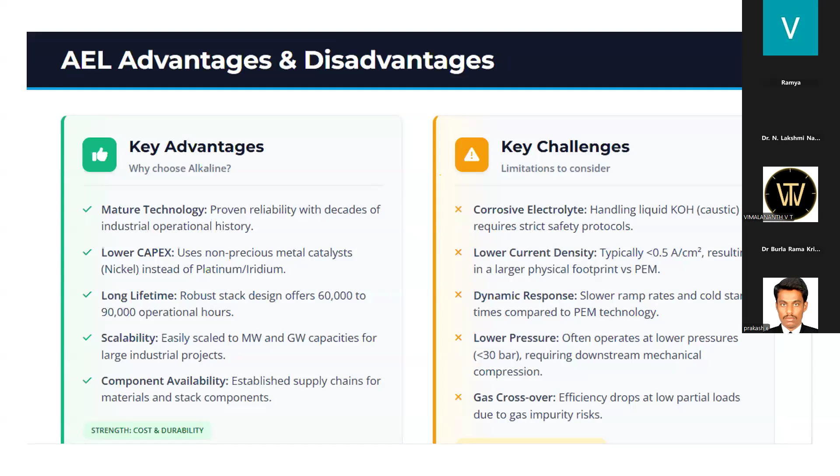So, degradation in the alkaline system - as I told you, one important thing is catalyst poisoning. After some time, these get deposited on the cathode and block the active sites. Another very important thing is diaphragm blockage - the pores get clogged, creating more resistance, making it very difficult for hydrogen to move from one end to the other. And also the anode passivation - that is also another major issue.

So now, what are some of the latest technologies or latest research that has been done? Of course we'll discuss more about it, but as of now, what are all the things that have been done?

One thing is Aquahydrex technology - they are using some novel electrode materials to improve the gas bubble release dynamics. Same with bubble management, and the balance of plant has been reduced. The design I showed was a generalized one, but they have done research to reduce the balance of plant and enable direct gas extraction. And of course, diaphragm integration with zero-gap architecture has been implemented for maximum efficiency and to improve gas purity.

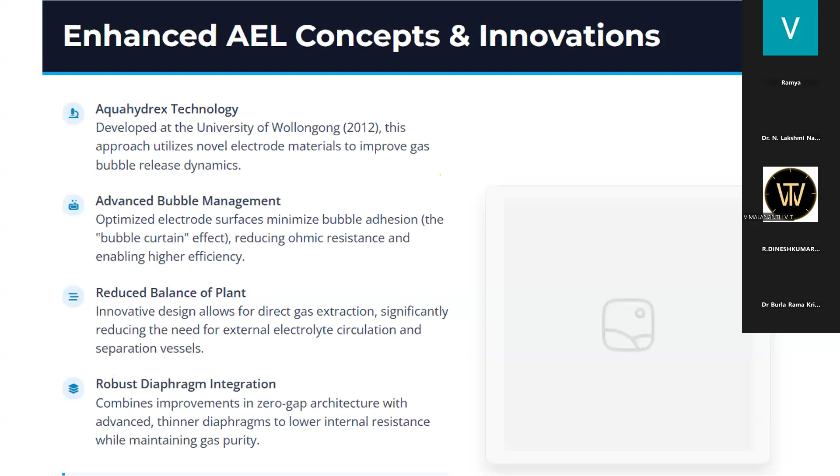Next, coming to PEM, which is the proton exchange membrane technology. Again here, we are going to do the same thing - split water into hydrogen and oxygen. How effective we are going to be is more important in this case.

So here we have a proton exchange membrane, which separates the electrodes and conducts protons between them. Water is split at the anode to form oxygen and hydrogen ions, and the hydrogen migrates through the membrane to the cathode. The typical operating temperature is similar to before, about 50 to 80 degrees Celsius. One important thing is the membrane must always be hydrated for the protons to conduct.

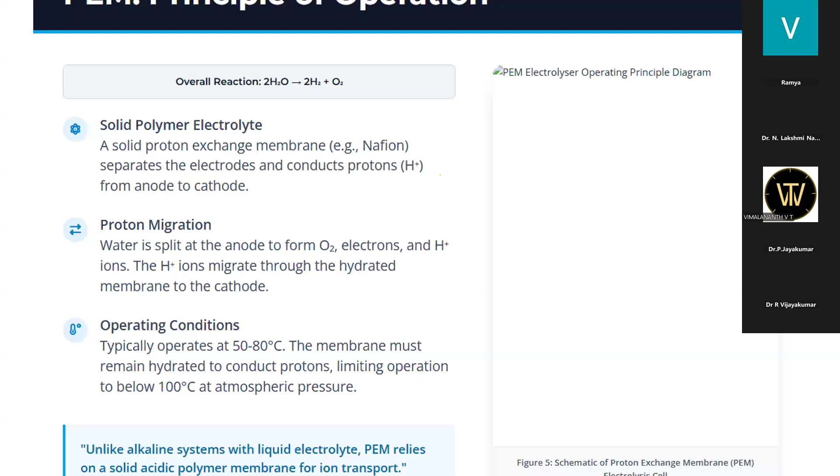So the membranes we generally use are polymers like Nafion. As I already told you, it needs to be hydrated always, and the working temperature is lesser than 100 degrees Celsius, typically maintained under 80 degrees Celsius mostly. The catalyst used is precious platinum, because of the acidic environment it is required. So platinum for the cathode and iridium oxide or ruthenium oxide for the anode.

This is the general catalyst that has been used. Between this, there are bipolar plates that have been kept, coated with titanium. Nowadays titanium alloys are being used, which is good for corrosion, rather than using stainless steel like in alkaline systems. But of course, the cost is going to be higher, but still the lifetime is going to be better.

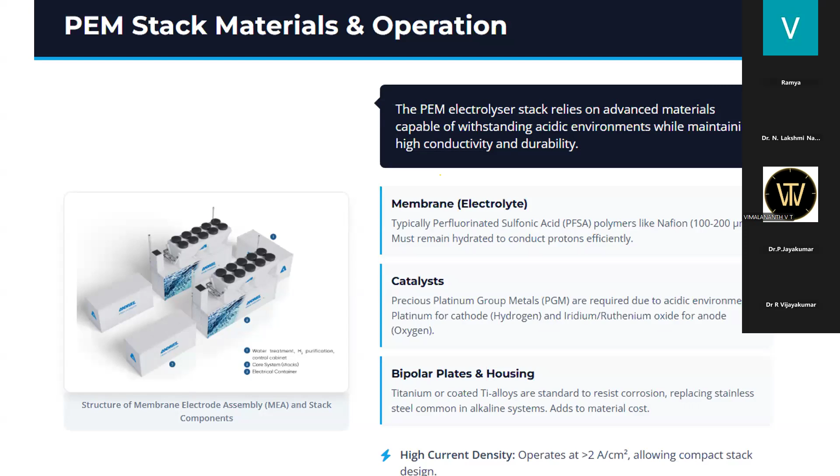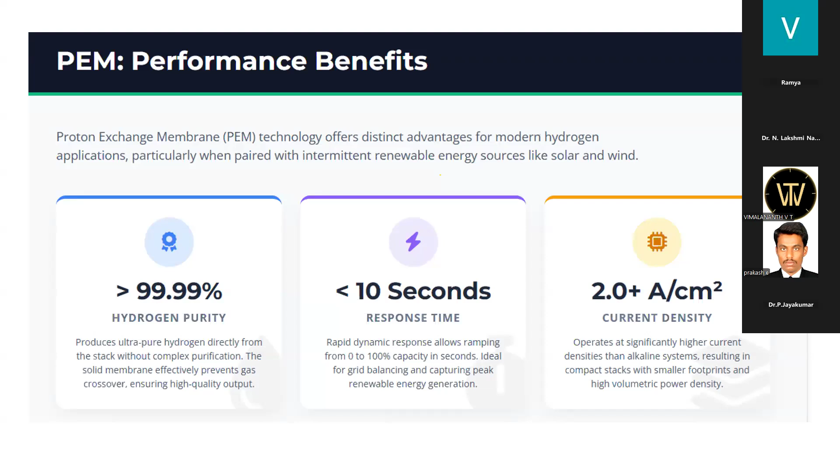So what are the advantages we get: one thing is obviously the hydrogen purity will be better. Another thing is the response time is going to be better compared to the previous one, and the current density is going to be higher as well, more compared to before. So PEM has these kinds of advantages, and of course, if we pair it with renewables, we will get very good green hydrogen out of it.

With respect to cost, it is obviously very high because the platinum and iridium cost is very high, and the corrosive titanium alloy is also significantly high. In 3 to 5 years you have to change the catalyst, because it will degrade after that. So these are all some of the running costs, and the initial cost is actually high for PEM. That is why it is not widely used in industries because of the initial cost.

So to give you a brief comparison about the alkaline and the PEM: here it is a liquid base, that is KOH solution, it is corrosive, but here we are using only the solid, which is a polymer membrane, that is a Nafion material generally used. Operating temperature is somewhat similar for both. Pressure is less than 3 megapascal in the AEL, but in PEM it can go up to 3 to 8 MPa. The current density is very low or moderate with AEL, and with PEM it is actually higher.

The response time is very fast for PEM compared to alkaline, and because of that it has very good efficiency as well, and the purity is actually highest for PEM compared to alkaline. One of the major problems is the capex. Because non-noble metals and stainless steel are being used in alkaline, the cost of AEL is less compared to that of PEM.

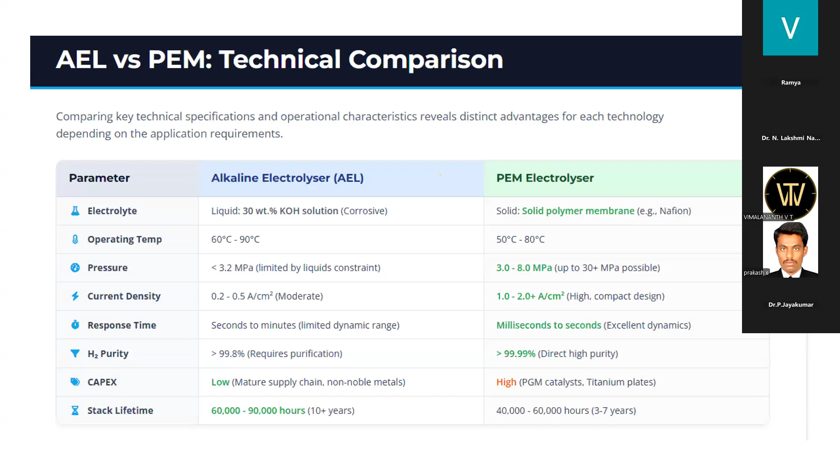As I already told you, because of that, most industries prefer the alkaline electrolyzer rather than the PEM electrolyzer. Lifetime is approximately 10 years for the alkaline one. PEM is about 3 to 7 years, because as I told you, after that the catalyst needs to be changed. So that is one limitation with respect to the PEM.

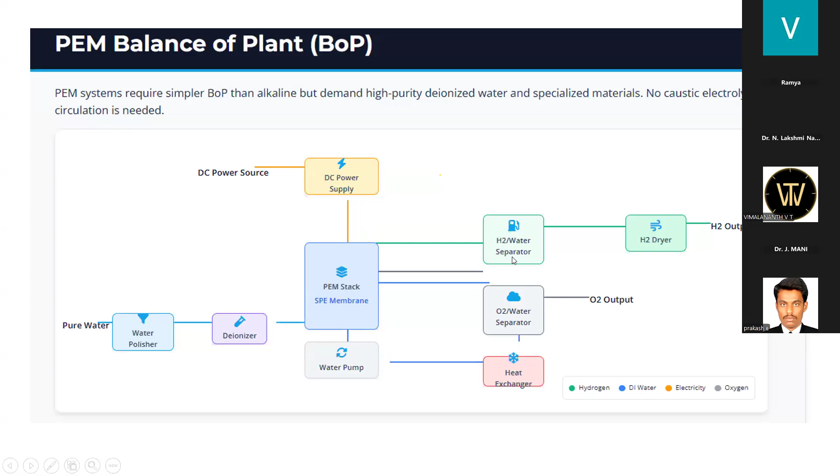Because here also we need water, as I told you, it needs to be hydrated always. We have a separate hydrogen and water separator, because when the hydrogen is produced, there will be more water in this case compared to the previous one. We also have a hydrogen dryer. In the previous system we had a hydrogen-oxygen separator, but here we have a hydrogen-water separator and an oxygen-water separator. We also have a heat exchanger connected with these two, so that the separation process is quick.

So the pros and cons: of course, the design is very compact, and it has a very good dynamic response, very good purity, good pressure capability, and also it's very safe, because we are using a solid electrolyte unless liquid, and hence the gas mixing can never happen. So that is one of the major advantages of this.

Of course, the limitation, as I told you, cost and the lifetime is one of the major limitations. And another very important thing is we need deionized water required for this, to prevent the membrane degradation. So that is another thing - the water quality has to be in the purest form.

Now, combining the benefits of both alkaline and PEM, we have something called AEM electrolyzers, which is not that famous yet, but still the researchers have been successful, and it is actually better because it's combining the advantages of both alkaline and PEM.

So as you can see, it has a hybrid advantage, where it again uses a solid polymer, where the ion transfer is happening through the membrane from the cathode to the anode. Now, the advantage is, in alkaline we have a non-noble catalyst, and that is being used along with the PEM, where you can have a compact design as well. Compared to the alkaline solution type, this is better.

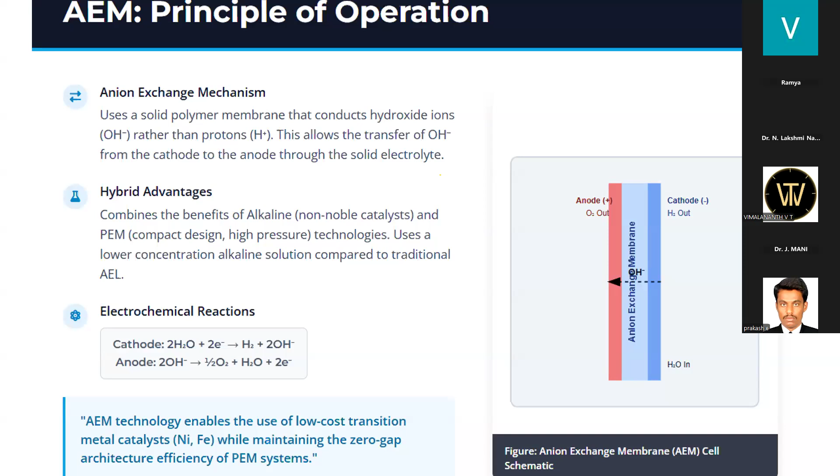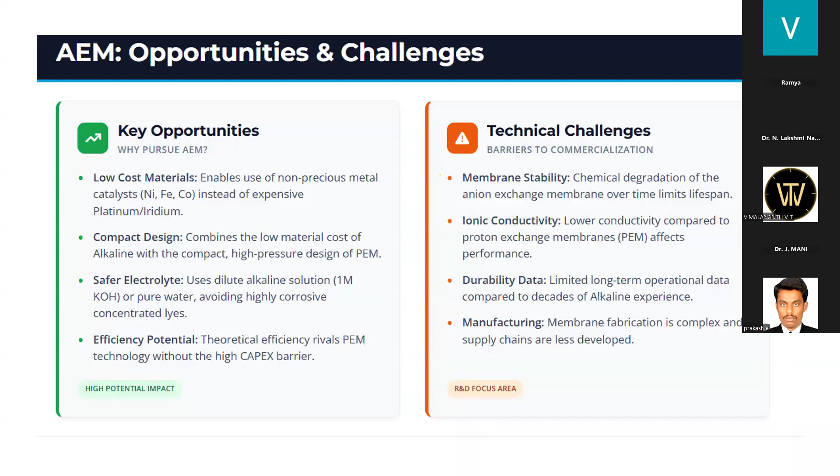In terms of material cost, compact design, and safer electrolyte - these are some of the major advantages with respect to this. Some technical challenges are still there that need to be addressed. Obviously, membrane stability is one of the major problems, and conductivity, and also manufacturing or fabrication is a bit complex in this case. So a lot of research has been going on in this area, in AEM, combining these two.

So the next one is solid oxide, which we call SOEC, and this is one of the proven things, and a lot of research has been done in this - this is one of the advantages compared to all the other things. So here, what we are basically using is a solid ceramic electrolyte. Generally, yttria-based zirconia has generally been used.

So what it does is it actually conducts the oxygen ions at a very high temperature, and that is why we don't require any liquid electrolytes in this case. And here, instead of supplying water, we are supplying steam at the cathode. So that is one of the major advantages in this case, because your lifetime actually increases. Another thing is you don't need a dryer or any other thing to separate the water.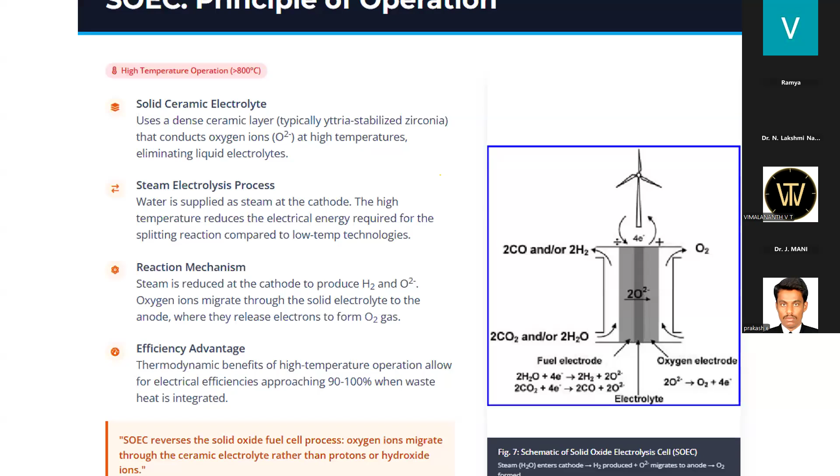So the electrical efficiency is actually about 90 to 100 percent, because the waste heat can also be used back, so that good efficiency can be achieved with it. So the heat can be used to convert the water to steam - the waste heat need not be wasted, it can be directly used again to steam the water. So in that case, we can achieve very good results. And obviously, it is operating at very high temperature.

From that, if we do the fuel synthesis, we can even get methanol, or we call it Fischer-Tropsch fuels also we can get, and it can also be used because nowadays we are also adding ethanol and methanol to fuel, and methanol is obviously going to come soon in our country as an alternate fuel mixed with gasoline. Already we have ethanol, and now methanol will also come soon. So this is one of the major advantages with respect to this. Here, of course, we are not getting pure hydrogen, but still this is a hydrogen carrier - so instead of hydrogen, we can use this.

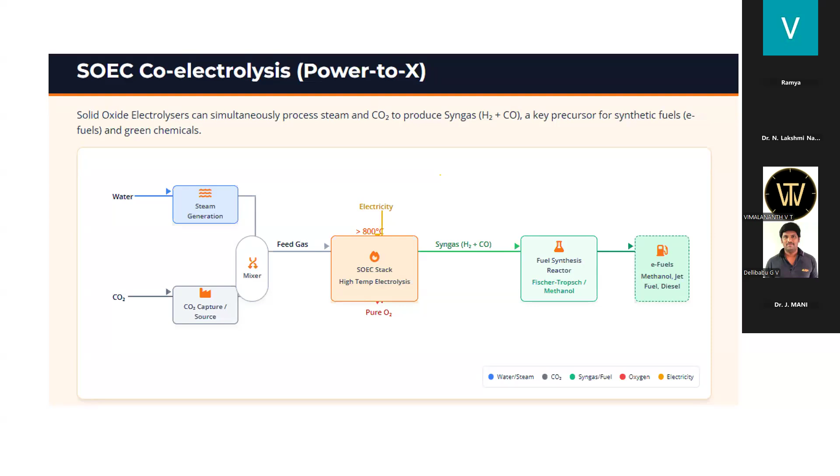Okay, so it has the same advantages, but one thing is the problems with respect to hydrogen gases can be eliminated when we are using these. So of course, when we are using the solid oxide electrolyzers, we can get very good efficiency when we use the waste heat for converting the water to steam. And it operates at a very high temperature of about 800 degree Celsius. And also the specific energy is also going to be very high in this case.

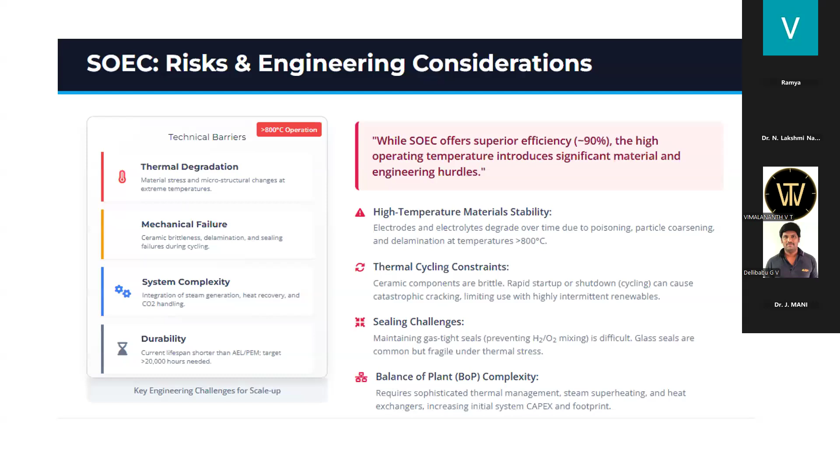Now, what are some of the problems? Obviously one thing is the thermal degradation, mechanical failure. That is one thing, and system complexity because of the lot of steam generation, heat recovery. It becomes like a closed loop system, and the system gets actually complex in these cases. And also, sealing is one of the major problems with this type of SOECs.

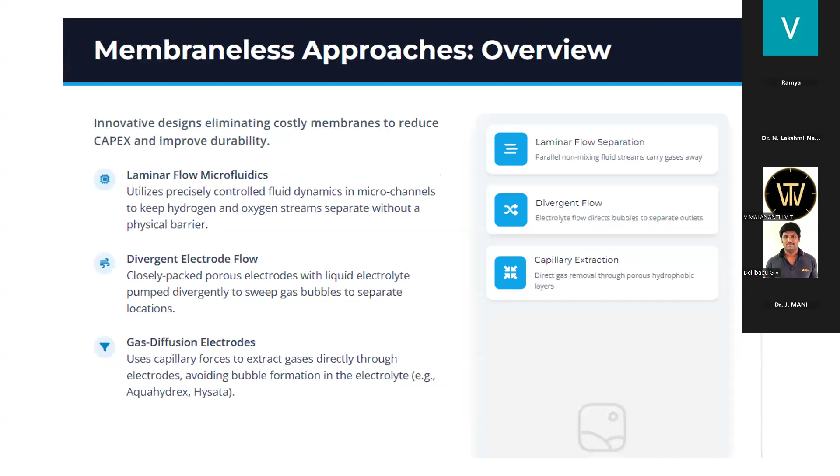Okay, now with this we saw various types of electrolyzers. Now what we are going to discuss is what are some of the new technologies that have actually been done in this one.

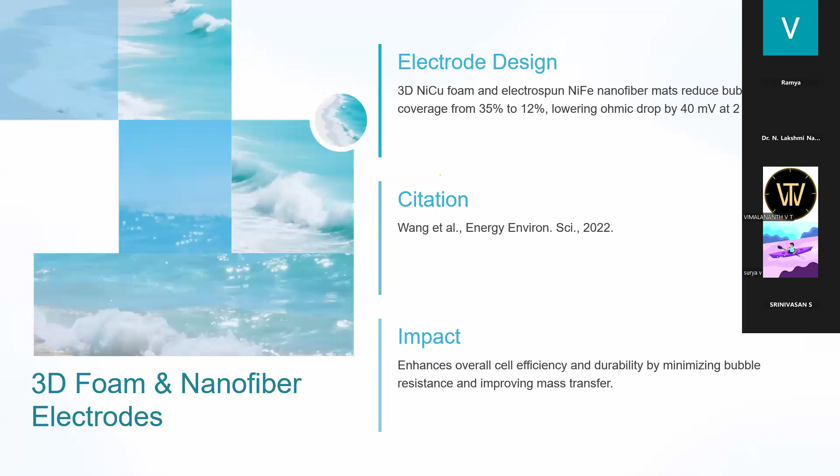With respect to the electrode design, Wang et al. has done a change in this. He's made NiCu foam and electrospun NiFe nano fiber mats used to reduce the bubble coverage, and also the ohmic drop has also been very good. So they have observed that their overall cell efficiency and durability was very good because they have reduced the resistance, and also the mass transfer was better.

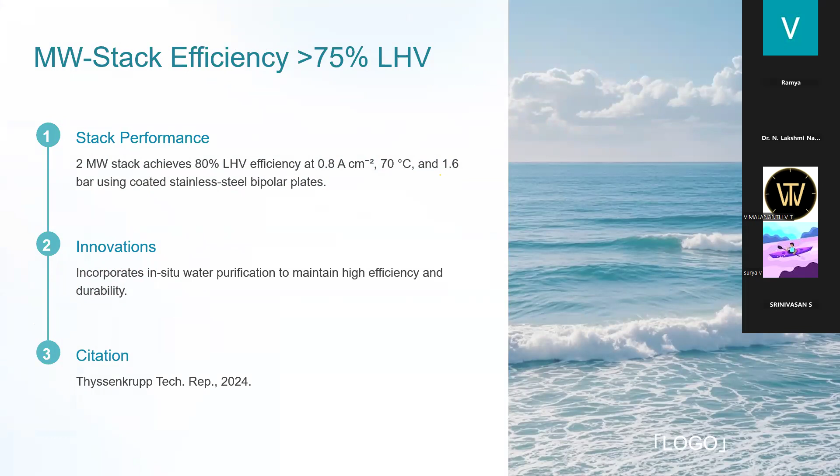So here, to improve the stack efficiency, what they did was they incorporated a system of water purification to maintain high efficiency and durability. Since the water was very pure, they were able to achieve very good stack efficiency in this case.

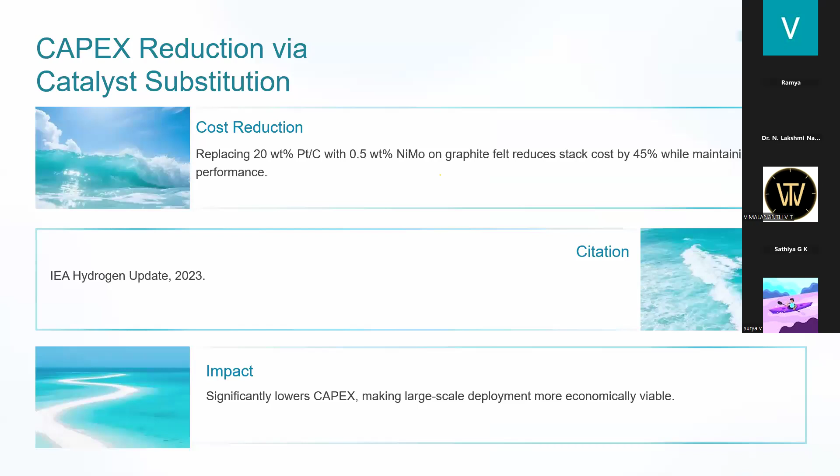So these are some of the things that have been done to reduce the capex and make large scale deployment more economically viable. These are some of the research done with respect to the alkaline electrolyzer.

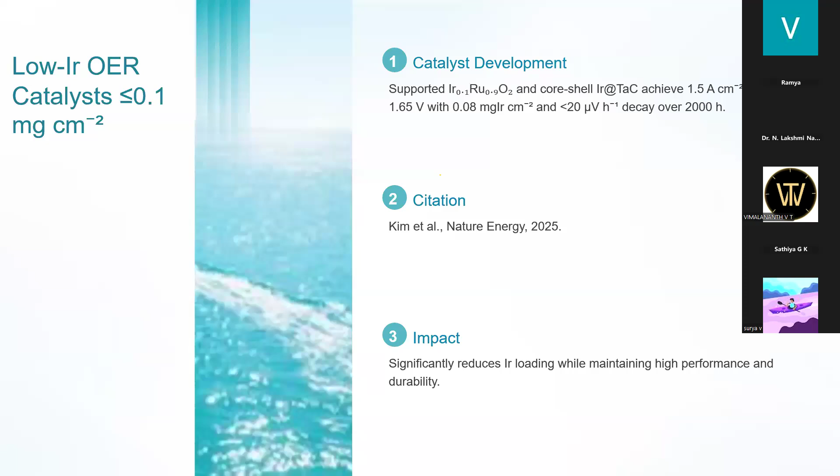Next we get into proton exchange membrane, where Kim et al. recently used a core-shell structure and achieved 1.5 amperes per centimeter square at very low voltage. They reduced the loading while maintaining very high performance and durability.

Also with the catalyst layers, Frindich et al. reduced the catalyst layer thickness to only 200 nanometers. Because of that, the response time was also improved, and this was achieved without affecting the hydrogen purity and performance. So this is one area the catalyst research can focus on.

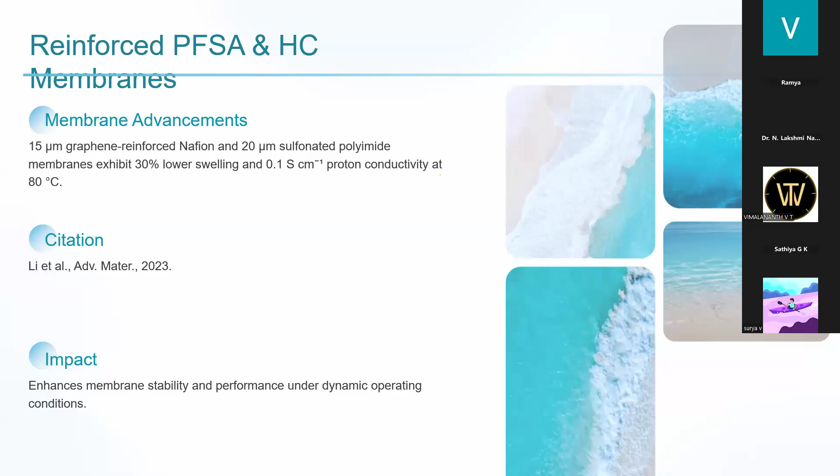With respect to membrane advancement, the graphene reinforced Nafion membrane is one area of research. A lot of work has been done checking performance under dynamic operating conditions by varying various parameters, and they found it enhanced membrane stability while performance remained on par with the normal membrane.

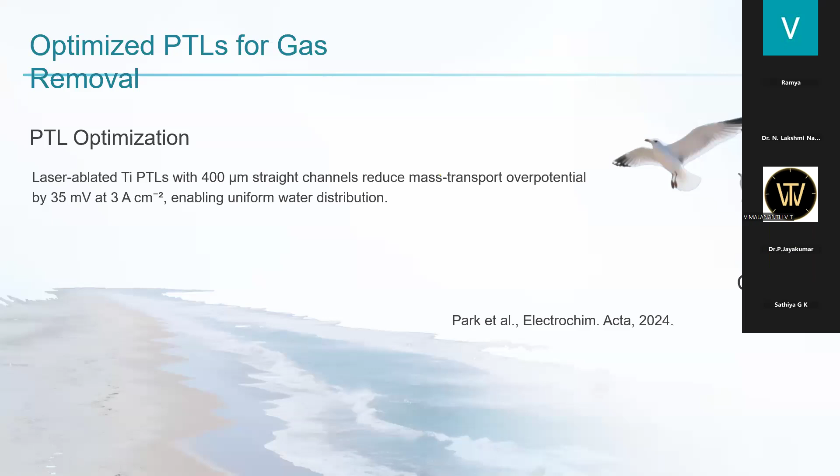This paper is specifically about better gas removal from the electrolyzer. This is one of the good research papers because what they did was design their own channel so that gas can be transported properly without affecting performance. That is one of the optimizations they have done.

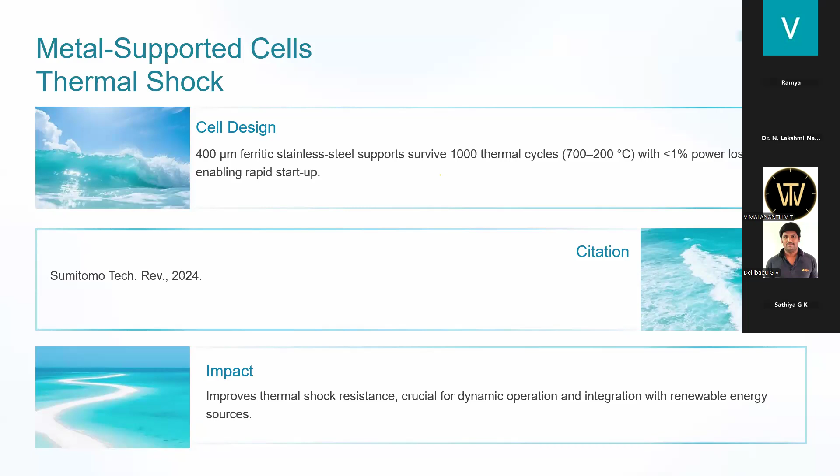With respect to the solid oxide electrolyzer, some research has also been done. They designed the cell using ferritic stainless steel, which can run for a very long time at very high temperature. They found the thermal shock resistance was really good, and the performance can be improved when...